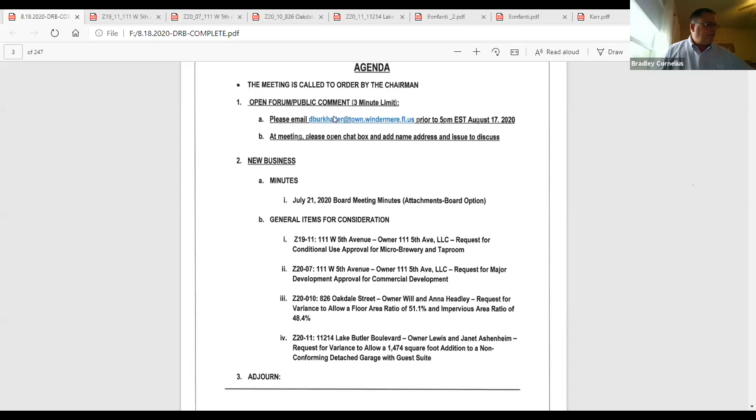So everyone knows who I am, I'm Brad Cornelius with Wade Trim. I serve as the town planner. And this evening, what we have is two cases related to the proposed microbrewery tap room at 111 West Fifth Avenue.

And these are, just so the board is aware, two separate hearings, and there'll need to be two separate votes, because one is for the conditional use, and I'll go into that in just a moment. And the second case is for the major development, or the site plan for the proposed commercial building. So we have two separate approvals or recommendations that we'll be looking for from the DRB with this case this evening. So we'll start here with the conditional use.

So the conditional use, the case number is Z19-11. Again, the property is 111 West Fifth Avenue. The owner of the property is 111 Fifth Avenue LLC. The applicant is Mr. Andrew McGhee. And as Robert said, Mr. McGhee is online with us today, and he will have a presentation for you about his proposal, his operation.

So what the request before you this evening is the microbrewery and the tap room, and it's in our staff report. It's one of these uses that is not clearly identified within the town's code as being either allowed or prohibited, it's just not addressed. So the town code has a provision for those kinds of uses that allows the town to consider them, and for the town council to approve them through a review process to assure that it's consistent with character and is a positive thing for the community.

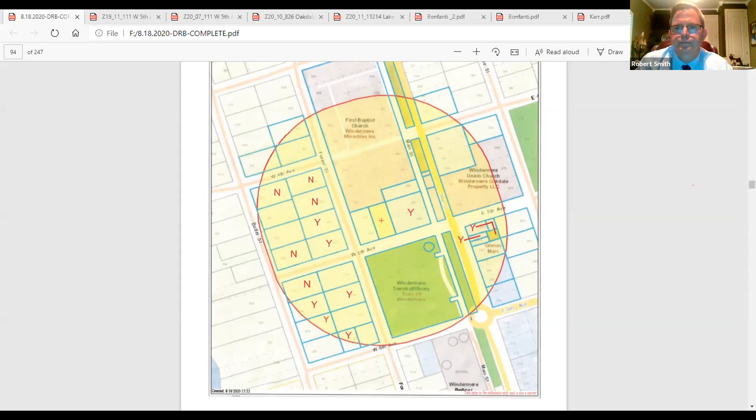Mr. Ober, that would be my recommendation, is do them separate. Can you see it? No. So right now we're hearing about the conditional use? Yes, only. Okay, thank you. Mm-hmm. All right, let me try to save it as a PDF, and then I'll be able to. Oops, sorry.

Sorry about that. Does Andy have it? Maybe he can share his screen. I do have it if I would be allowed to share it from my screen. Yeah, I'll go ahead and allow you to do it. I'm sorry about that, Andy. When I did a beta test, it was showing up on mine, which usually works. But let me go ahead and give you the ability to do so. All right, go ahead, Andy. One moment, just bringing it up.

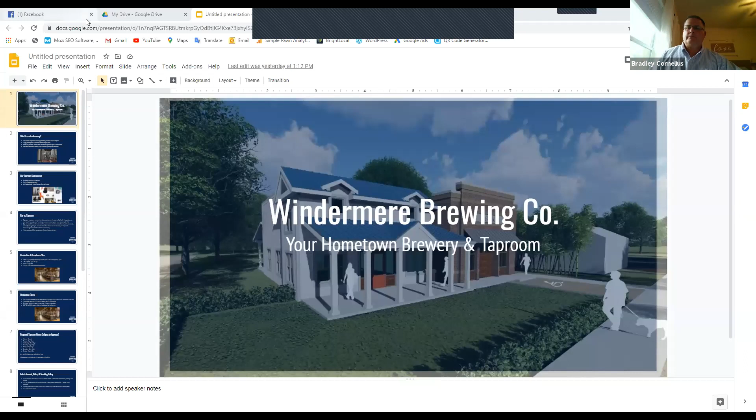All right, let me know if you can see my screen now. Yes, sir, I can see it. All right, great. So let's go ahead and start kind of where Brad was discussing, basically what the scale of a microbrewery is, and specifically what our scale is. One question for the board: would you want to ask questions after each slide, or wait till the end of the deck? I just want to make sure it's in the format that makes more sense to you. I think probably while we're on each slide, if anyone has a question, just jump in. Okay, that sounds good to me, it's not a very long deck, but it is definitely some granular information you might want more detail on.

Okay, all right, so let's discuss what a microbrewery is. As the industry definition goes, it's a small-scale independent brewery that produces less than 15,000 barrels per year. And as Brad stated, that is the Orange County limit, 15,000 barrels per year. They actually use the industry definition for a microbrewery when Orange County adopted their code. Basically, the major and primary point of a microbrewery is to supply their own tap room with cereal malt beverages, or beer in the less legal sense of the word. It is the historic model that most small towns have used throughout Europe and the United States.

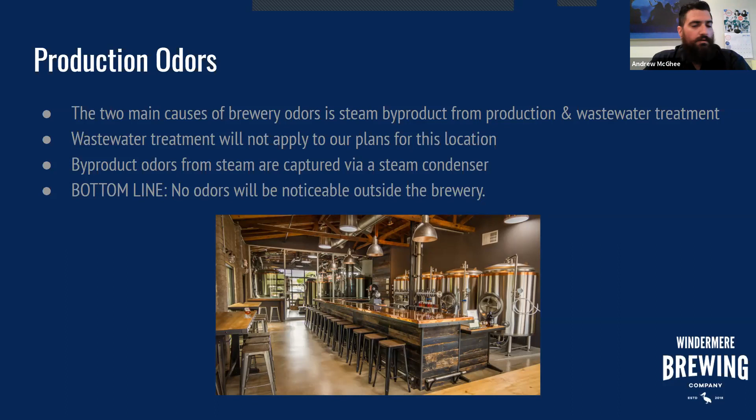I do want to make a point already: Sunday, we already had a pretty big discussion about 12 p.m. probably not working, because we want to be mindful of traffic. So we'll probably say 12:30 or 1 p.m. on Sunday, since we want to let the outflow from church get out before we open.

Last call for any closing time will be 15 minutes prior to all closing times. And after 10 p.m., if we're able to get some later hours, as Brad mentioned, these are all within the town's ordinance for alcohol consumption.

After 10, if we are open past 10 p.m., any outdoor common area - the backyard, back patio, or front patio - would be shut down. So any patron at that point would have to be inside the tap room, to alleviate any outside noise we can control, and bring everything inside after 10 p.m.

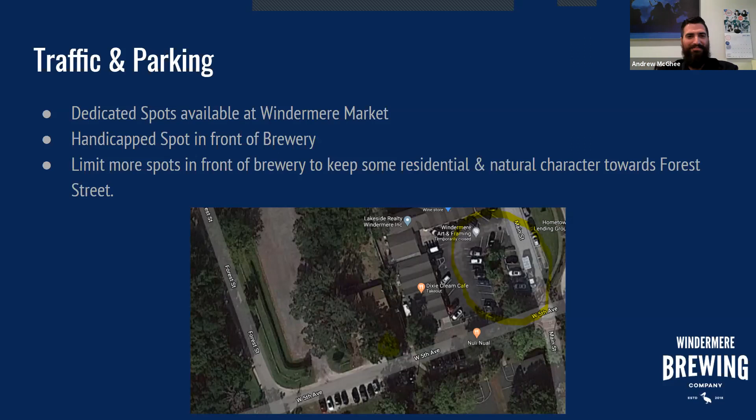So that is pretty much our detailed overview that really breaks down all the key points in our conditional use, everything that we needed to cover for conditional use. At this point, I'm going to go ahead and open it up for questions, but I'll turn the reins back over to Robert.

Outdoor seating in the back, or what kind of seating are you gonna have inside and outside? Inside seating will be planned for fixed seating. We still do not have an exact number, but we have a rough idea — around 40 people. That's absolutely contingent on two things: septic capacity and fire code.

The second thing is if we do venture into outdoor seating, which we have no plans on at opening time currently, it would be exactly what Dixie Cream does — we'd work in non-permanent or collapsible seating. But all in all, the plan for the backyard is just more open space, a place to play yard games, sit down in the grass, bring a blanket, that kind of thing at this point.

So is there going to be music inside the tap room? As far as on the speakers, not live entertainment. As far as live entertainment is concerned, no, because we covered that in the development meeting — we are currently not allowed under the code to allow live entertainment.

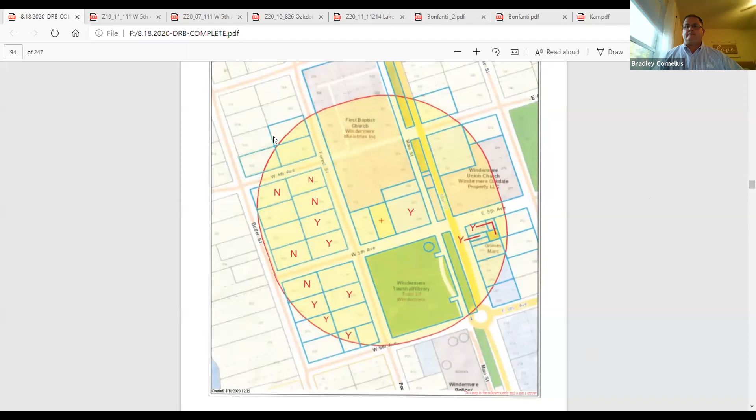I think the back property line is pretty much on the other side of the fence from the children's playground. That's correct. The children's playground is behind this property.

I will add real quick, the church is one of the first people that we went to when we were planning all of this. We wanted to make sure that we were not going to be stepping on any toes with them, and that we are meeting all of the expectations that they had for us as well. And Andy could probably comment on that a little bit further if he'd like.

So I actually have, and of course it is completely up to the church to comment on their own, so I won't comment for them. But I have sat down in person with the church and discussed these plans with them, and have actually reached out to them again leading into this process. Once again, no conflict, but I will not put any more words into their mouth because I am not them and I do not speak for them.

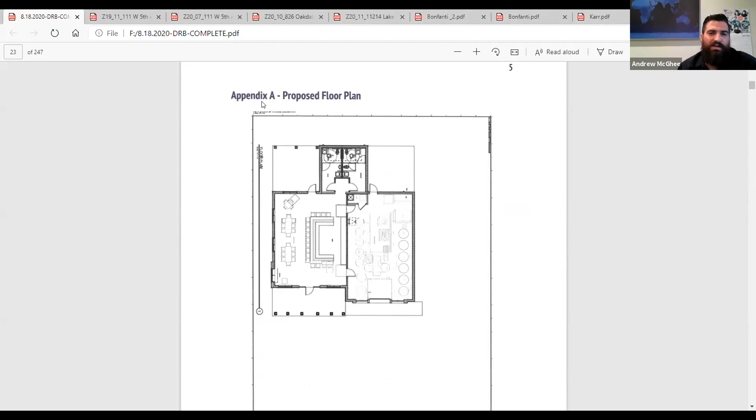At the same time, to address the school issue, when we get into the design plans, you'll see a lot of the mitigation that we are looking at to screen and add much more barrier between that fence line there. Of course, yes, we do know that there's a playground there, but if you're going to use that argument for us, you have to use that argument for Tim's as well. As Brad said, it's not in conflict, it just has to go under conditional use.

I will also like to mention, just as a personal anecdote, that I do send my child to that school. I would not be opening an operation that would do any harm to children. So that's just a personal anecdote. I bring it up because it's been a law for a long time in Florida, and we've tried to follow some rules here. That's all, nothing personal at all.

But I look at the hours of operation, and it seems like they're completely opposite. Yes, Peter, thank you for bringing that up, I actually forgot to mention that. We did put some thought into flipping those hours to try to be very much on the tail end of school. Realistically, from 3 to 4 to 5 p.m., you're not going to have a high amount of traffic at that point anyway.

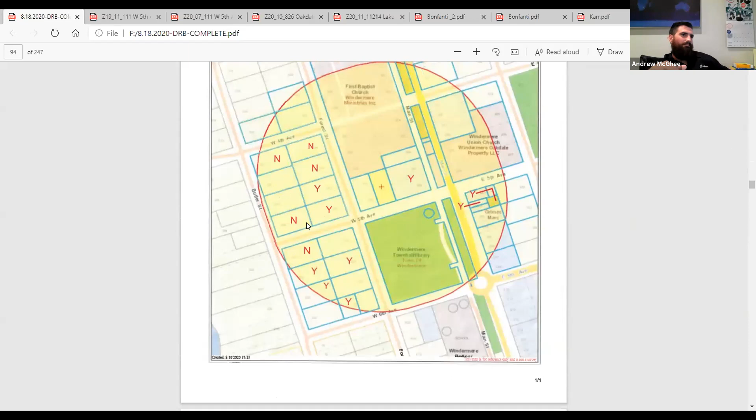I'd like to point out, even though we're absolutely flexible on the hours, if we go back and look at the 11 to 8 for and against within the 500 feet, the two closest to our actual facility are actually yeses. So I wanted to point that out. And then you have two no's right next to them. So right, just pointing out the yeses. Yeah, I was glad to see that. Yeah, and there's a circle of no's around them, but okay.

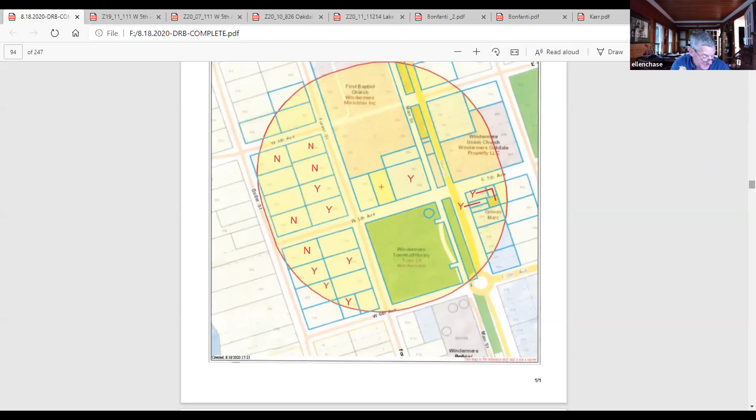So we can sit here and discuss things like noise level, parking. These are notes I made to myself: outdoor noise, which he says there will be none unless it's made by his clientele, I suppose. 40 seats, indoor only right now. And then hours of operation. So all these things are things we can limit with the conditional use permit.

Yeah, with the noise ordinance, I think that would be applicable. And remember you have the code violations and police call-outs as well, which is your leverage over making sure they adhere to whatever conditions you impose on them. Right, so as far as decibel levels or anything like that, that's going to be really hard to manage. But if there are calls relative to noise complaints, that's something that can be documented and obtained for us to follow through with the code enforcement procedure.

Wish that worked for Bird Island, but... Isn't it the noise ordinance, Robert? Isn't it like after 10 o'clock you shouldn't be able to hear anything within 300 feet or something, or less? Correct, you shouldn't be able to hear it, and if the neighbors are going to hear it, they're going to call.

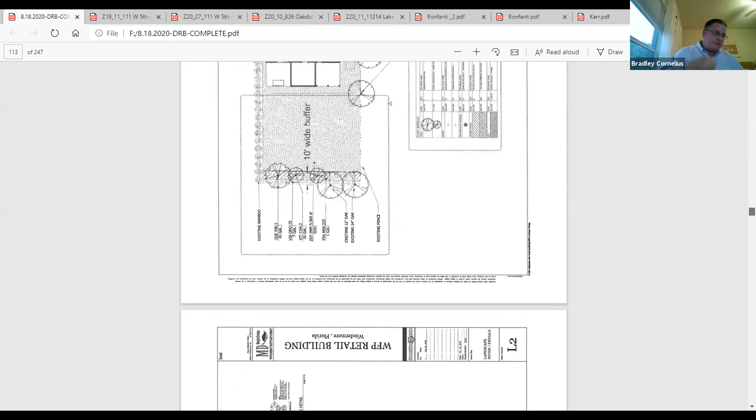Okay, so we'll move on to the next item, which is approval of the commercial development. Mr. Chairman, our next item is case number Z20-07, at 111 West Fifth Avenue. This is the major development review for the proposed commercial building there.

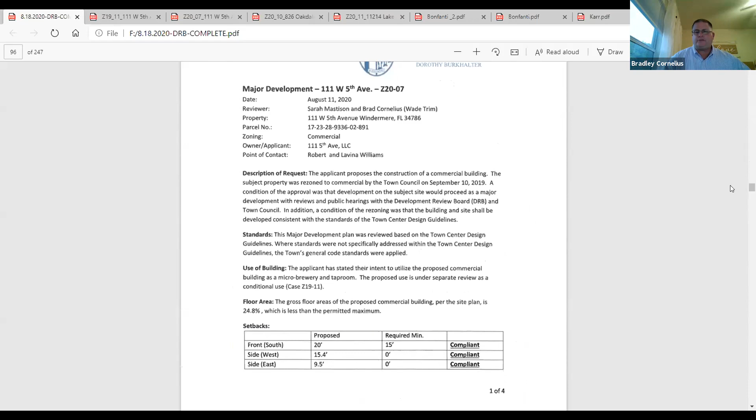So this request is to develop a commercial building at 111 West Fifth Avenue. To be clear, the proposed building is designed based on a proposed microbrewery, so the analysis in terms of parking and traffic is based on that. What the owners are looking to do is construct a commercial building on the site. The building is actually approximately 2,519 square feet under AC, and with the porches added, it's 3,847 square feet.

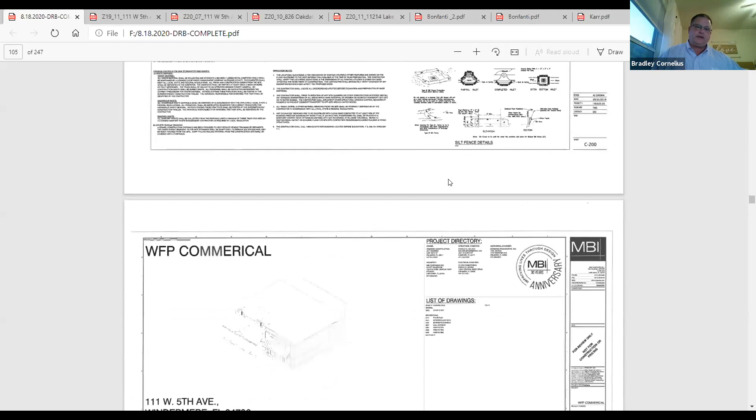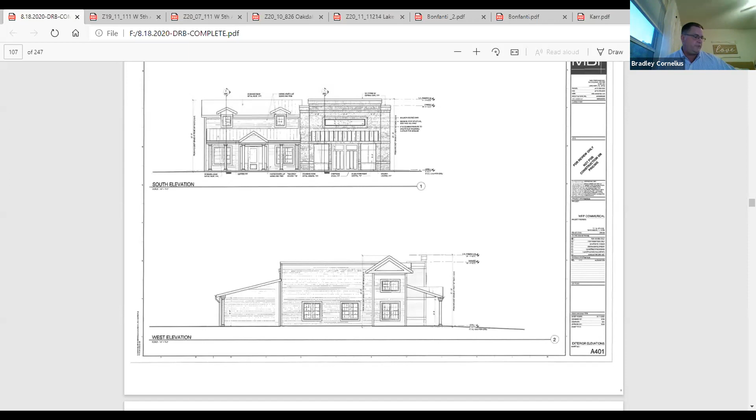Thank you, Robert. If you go to the part showing the building elevations now—there we go, we'll stop there. So there is the proposed building elevation, the front of the building. This has been developed and designed to be consistent with the architectural design guidelines for the downtown district. It provides facades that are consistent, awnings that are consistent, and consistent materials. So they designed this not as a typical box commercial building, but with the design guideline architectural standards in mind, which was part of their condition of approval.

Robert, if you can go a few pages forward, there are some color renderings where you can see, thank you, sir, the color rendering of the proposed facade of the building. You can also see, jumping ahead a bit, the proposed landscaping at the street with the hedge, as well as it coming around the side of the building, creating a courtyard area in front. There you can see the handicap space and the sidewalk with the building. So in our review, we found the facade consistent in terms of the architectural design.

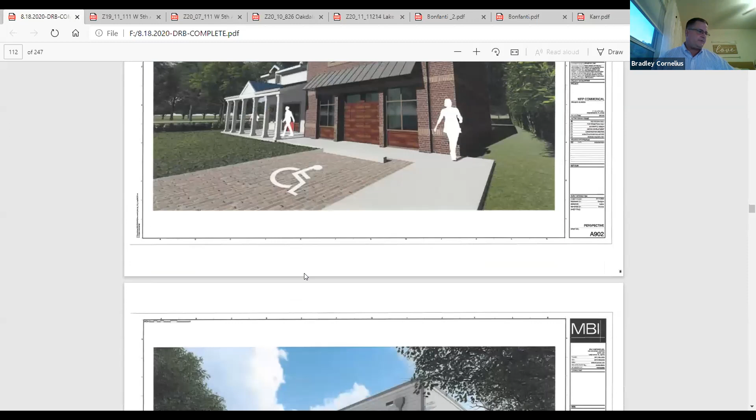You can go to the next page, Robert, please. This now shows the back of the building, the back porch. This would be the porch on the side by the parking lot, so on the west side of the building is the open porch behind.

Next page, please. Now this is the landscape plan, part of the landscape plan. There are several pages of it. As Mr. McGhee said earlier, at the back of the property where it says 10-foot wide buffer,

that is the buffer that would be required under the design guidelines to adjacent properties. We actually required them to enhance and enlarge it and add more landscaping back there, which they did. They revised that, added more trees and more landscaping. There is already a fence between the two properties, but this would be adding landscaping to that fence line.

You can see there'll be hedges along the eastern side between them and Windermere Market, and as we saw in earlier pictures, hedges along West Fifth Avenue coming around the side, as well as in front of the small retention area, which is all required by code to be screened. I will say one area deviates a bit: there's a requirement for landscaping along the base of the building, along 50% of the front facade. But instead they're providing the landscaping out front on West Fifth Avenue, meaning you don't see the base of the building where the landscaping is placed.

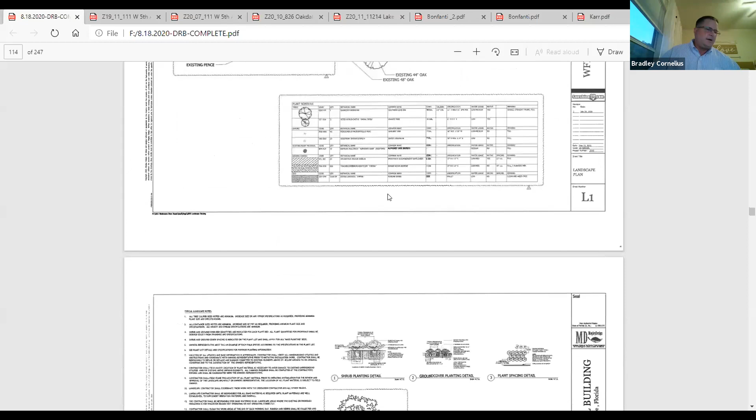That is the request for that part of it. Let's go 2 more pages—these are more landscape details. One more, right there, thank you.

What this slide shows, as we said earlier, is the plan for this commercial building to use a shared dumpster at Windermere Market. There is a plan to improve that area, as Robert is showing, and actually make a sidewalk connection between Windermere Market and this proposed commercial building. So that is part of this proposal.

That work would have to go through a separate right-of-way permitting process with Public Works, since a lot of it would be in the right-of-way of West Fifth Avenue. It has been preliminarily reviewed by Public Works, and they did not object to it occurring. It just needs to be worked out if this moves forward. So that shows the improvement in the area.

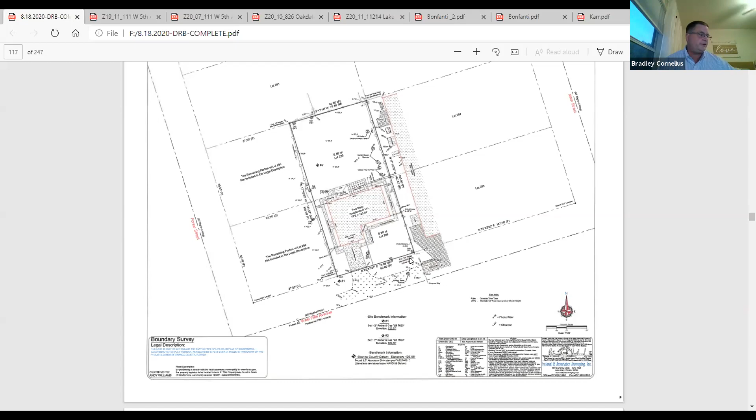They will also be screening the dumpster that's there, which would also be an improvement over the current condition. So that is my summary of the major use and the highlights of the major components of it. We do believe it is designed consistent with the design guidelines.

So the next step would be for the DRB to provide any recommendations or comments on it. Then it would go to the town council for two hearings, in September and October. So that is my presentation. I can answer any questions.

I'm not sure if Mr. McGhee would like to add anything to the site plan discussion. Just a few things—of course, I'm speaking on behalf of the site plan as well this evening. I wanted to add quickly that although the primary idea is to put the brewery and tap room within this building, for the applicant's sake, I'd like to clarify this is an open commercial concept. So whether or not the brewery taproom conditional use is approved is not necessarily contingent on this building. I want to make sure I put that out there in the building owner's best interest as well.

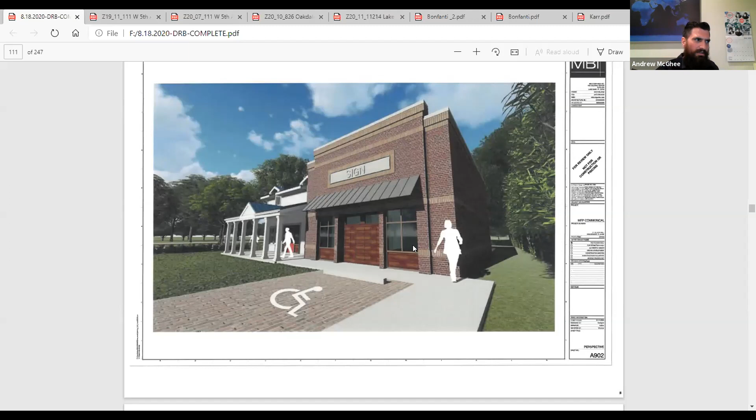And the other thing, I think Brad pointed out, is that we do have hedging on the side facing Forest as well. Did we make sure we pointed that out? Yes, you have the landscaping along Forest Avenue. Yes, sir.

And if you go even further down, where that hedging is and towards the oak trees, we would have more screening there as well.

And I do want to say, Mr. McGhee did bring up a good point - that is correct. This major development would not be limited just to a proposed microbrewery, and the design standards would have to be consistent. The parking would be the same no matter what kind of use went in there. It's a flat 4 per 1,000 standard, no matter what type of use goes into that building. So if this building were approved, it could be used for other uses. Absolutely.

I have a question on the handicap parking, where it's located, and then we have the loading zone for Dixie Cream and that whole complex and this building. What's the setback on having handicap parking next to loading zones? Is there anything about that in the law? There's not, and the loading zone would actually be fairly well separated from that, so there is not a conflict there with the loading zone and the handicap space.

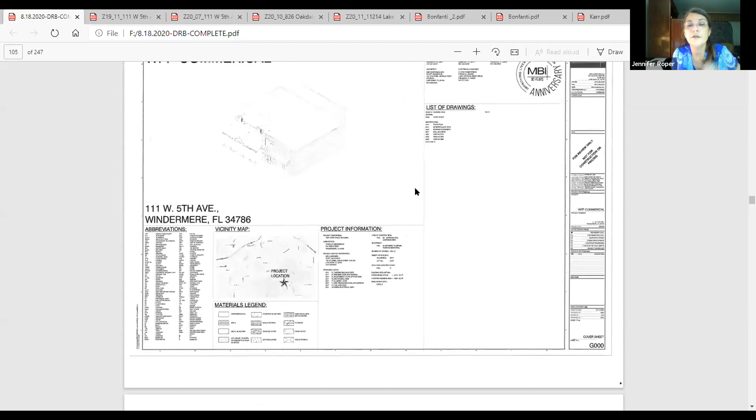Okay, so the loading or unloading would never pull into that handicap spot to pick up or drop off? I can't say they would never do that, but the designated loading and unloading would be on the Windermere Market property. And then they'll carry everything over to their place? Because part of this plan is they make a better connection with the sidewalk between Windermere Market and here to facilitate that happening.

Brad, just to add - right now there's no indentation, and their intent was to make some sort of indentation so it wouldn't be blocking the roadway when they do their deliveries. Now, most of the deliveries are going to be for Dixie Cream and not for whatever goes into this building.

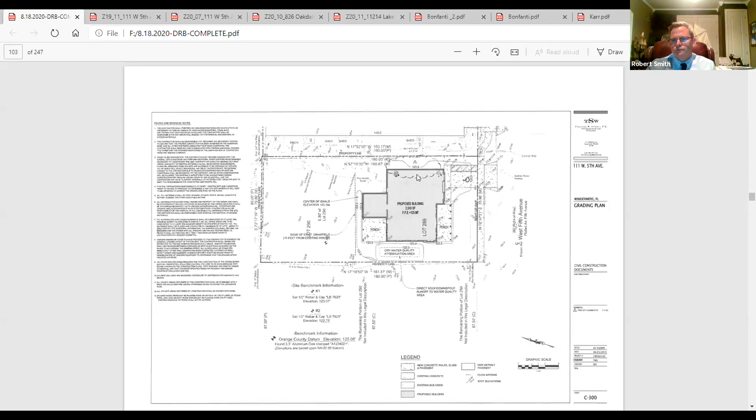Right, because it is a good distance away that it's safe. It wouldn't block access to that handicap space. Okay.

I guess whoever the tenant would be would know that was handicap and not a delivery spot. Right, and if this major development is approved, that would be a condition of the major development that that has to be the handicap spot.

And this is on septic, but it is on county water? Is that correct? That's correct. Yes, ma'am. Okay.

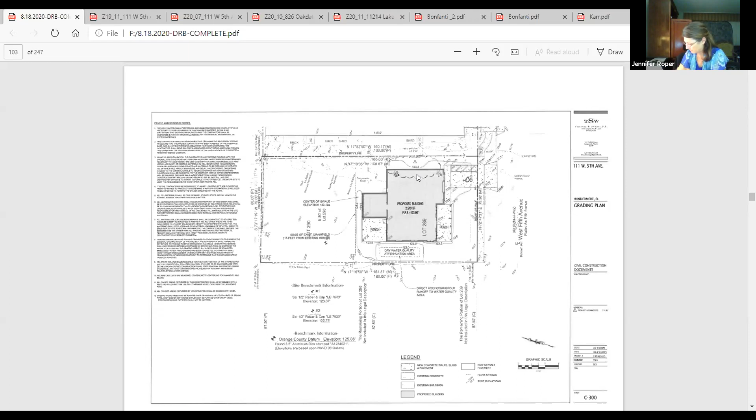Does it meet the floor area ratio and the impervious? Yes, it's well under the floor area ratio and it's well under the impervious. The floor area is 24.8%, and that includes the outdoor porches.

Where's my impervious? Yeah, and I didn't write my impervious, but the impervious is well under the 45%. Okay.

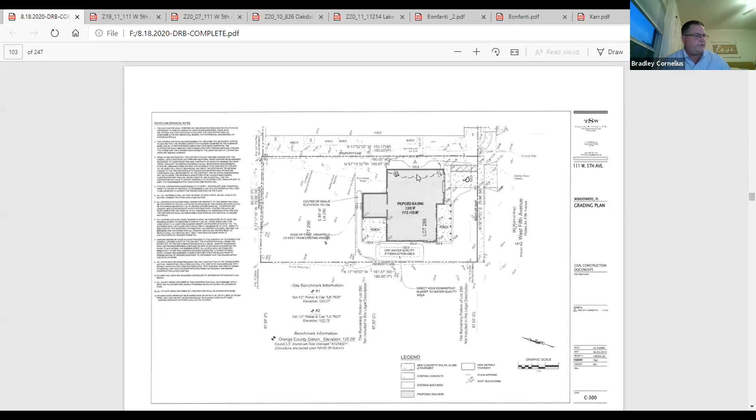And the building height is less than 35 feet. It's roughly 28, 29 feet, but it's less than 35 feet.

The area directly behind it, is that the playground? There's no other building back there, is there? Right, on the back of the fence is the playground on the back side of the property. Correct, that's right.

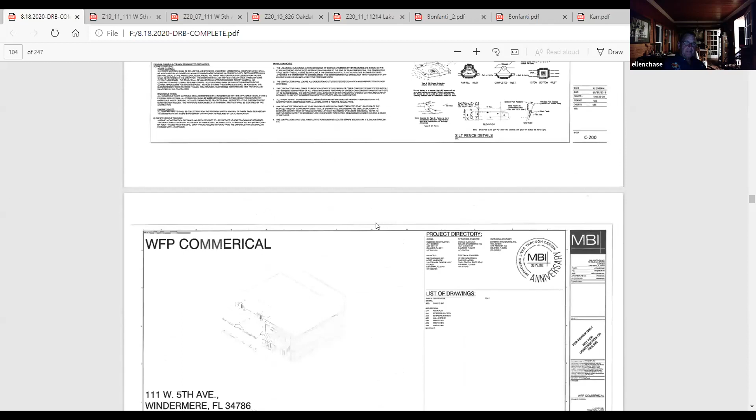And I think nothing else could really be built further back, because isn't there like 2 septic systems in there now at this point? There's the house, and then there's Dixie Cream. Right, there's the big septic system in the back, so they're pretty much limited to go any further to the back of the property. Correct.

I was concerned about wells, because I know there's some heavy duty septic that's got to be going on in that backyard by the time these two were built, between Dixie Cream and whatever impact that would be - but there's nothing back there, I guess, to impact.

Well, I mean, Forest Street, I guess, if it ran that far, but it probably meets the 120-foot distance from a well. And those septic systems have been in place, and any new system would have to go through permitting with the health department, Orange County Health Department, and meet all the current requirements.

Was there 2 bathrooms in there before? Is it kind of still having the same number of bathrooms? I guess, I don't know what was in the house prior to it. Not important.

It had 4 bathrooms, the current house. But the septic system is going to be based on whatever business goes in there, because it's very different if it's an office versus if it's the brewery. True - any commercial will be permitted very differently than a residential septic system.

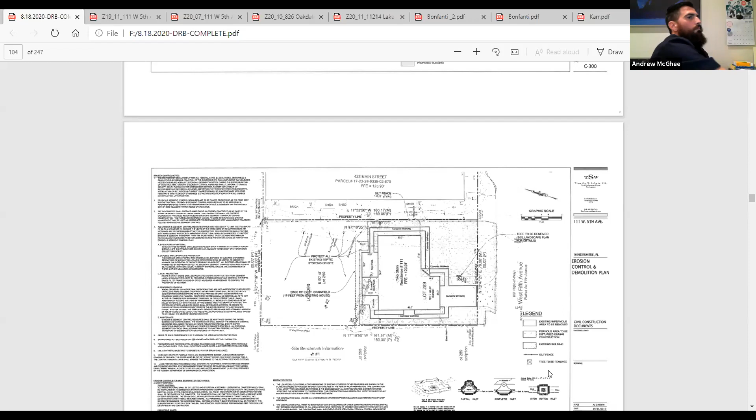I'd like to make a motion to approve this major development approval for commercial development. Anybody want a second?

If this is approved, and another business comes in here, just in case the council doesn't approve the brewery, would that be a conditional use as well, based on the way this is currently zoned? No, I need a second before further discussion, please. Or the motion dies for lack of a second.

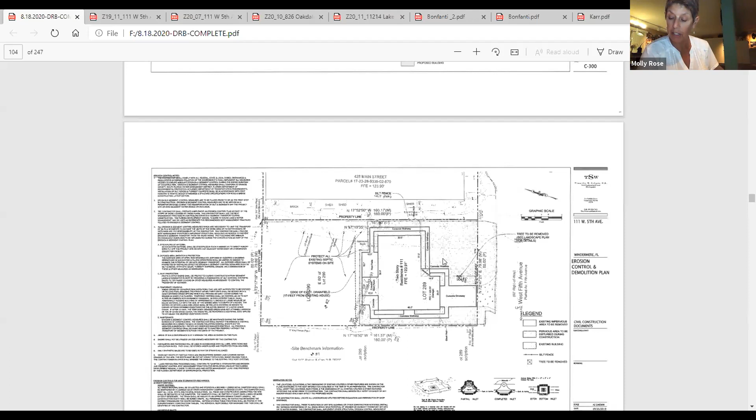What was the motion? I made a motion to approve the major development approval for commercial development. I'll second it for discussion.

I see on this major development, in the packet, it has use of building, but it does say the proposed use is under separate review. So this doesn't bind anything to the conditional use. That is correct, that is correct. This doesn't bind it. Okay.

This is basically a redevelopment plan as a commercial building. That is correct, yes ma'am. The condition only goes with a use. So if another realtor goes in there or another type of office, then it wouldn't need a conditional use permit. Correct. Okay.

All right, any other discussion? Since we do have the residents there, I would just, and it may be in here, I just haven't been able to read the whole thing, that we would have all that buffering, the buffering on the west side and the north side especially, thinking about, of course, not knowing what would be there.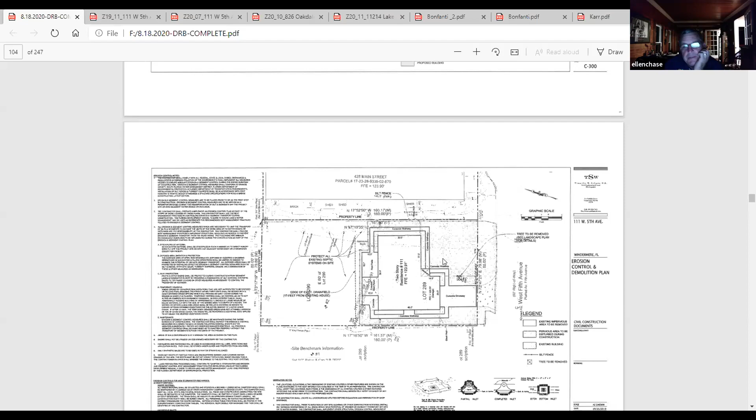Okay, so does it have, I'm sorry Frank, can you scroll back to that, Brad? The landscape plan, I think Robert's got control there. Because the drawings, it's hard to tell. So it shows the landscaping down there.

See, that's behind Dixie Cream, is where I see that hedge. I don't see one on this side where the fence is. Well, on the south side we did not require them because that's abutting a parking lot. So there's no... no, that's west, isn't it? This is where the arrow is. Yes, that's west.

Right, so the parking lot sits, I'm moving my mouse so you can see. The parking lot sits where Robert is. So in terms of buffering between the building and a commercial parking lot, or the town's parking lot, that's not required. Again, you can recommend it, but it's not required.

And as Robert said earlier, the parking lot has its own buffering with the berm and the enhanced landscaping on the parking lot. So what they did is they increased the buffer and landscaping here on the back side adjacent to the church playground. And then they're providing landscaping between them and Windermere Market, as well as a landscaping hedgerow along West Fifth Avenue.

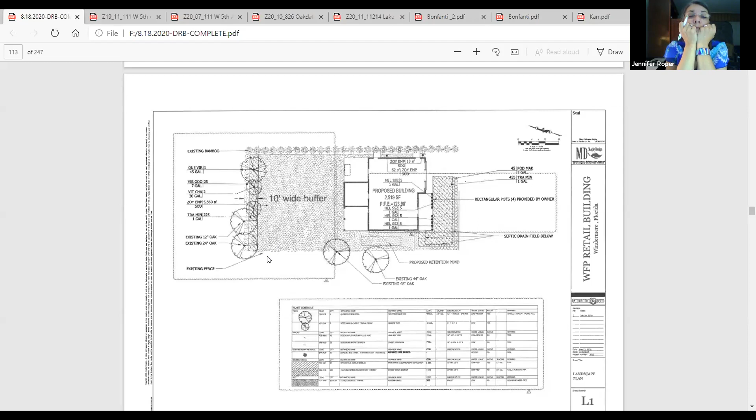Okay, so any other discussion? Are you okay with that, Jennifer? I mean, I would like, if it's something noisy, we don't know what'll go in there. It probably will be the brewery if past shows what'll present or future.

So I'd like to say that I'd like to have a landscape buffer all the way down the west side of that fence, all the way down the west side of the property, and then leave a place where the gate is. But I'd like to see a hedge there at least. Maybe it'll break down a little noise.

So Molly, are you friendly to that? I am. Okay, I am. So do we want to restate the motion? You got it, Dorothy, can you read something back for us? Or do we need to restate it?

I mean, is that additional hedge there on the parking lot gonna maybe create some security issues or be so isolated then? You have people coming out of there at night. You have a hedgerow, a 6-foot PVC fence, and I think what Jennifer's asking for is an additional hedgerow on the other side. I'm just thinking sound buffer.

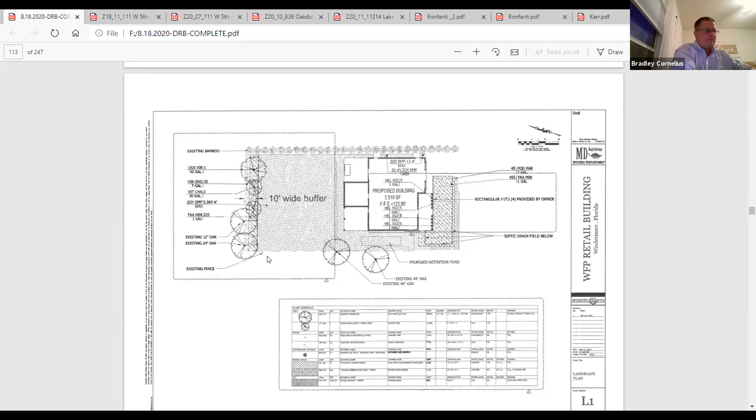It's 8:29. See y'all at 8:34, or sooner if we're all back, I guess. I'm definitely going to go grab a soda real quick. And we'll wait for Brad to return, and Peter.

All right, I put my dog away. We're good. Okay. Should we? We don't have a quorum though. Yeah, we just have to wait for Peter Fleck.

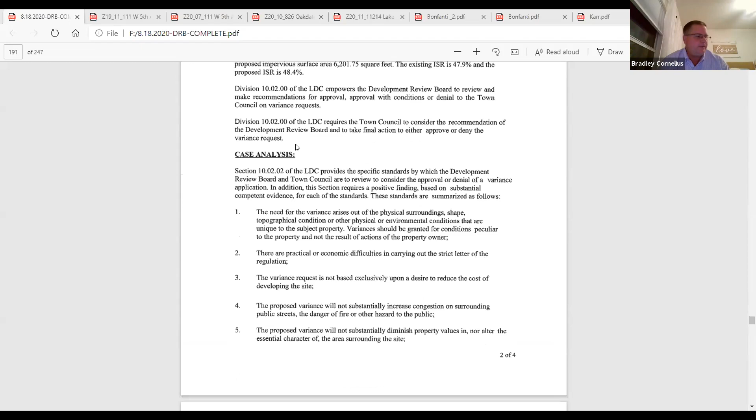This variance is related to an addition they're looking to do to their home, to add a bathroom to the back of the property. This came about when they submitted for their building permit and through our review of it. The situation on this lot is that the existing home was permitted and built in 2005 and 2006 through Orange County. I did see the permit from Orange County.

It currently exceeds both the maximum floor area that's allowed. The current home, detached garage, and everything is actually at 50.1%, and as everyone knows, the FAR maximum in the town currently is 38%. So they exceed the maximum floor area ratio allowed on a property. The site also exceeds the maximum impervious ratio. Currently, the impervious ratio is 47.9%, and their proposed addition, with other site work, would bring that up to 48.4%. As the board's aware, the maximum impervious allowed on a site is 45%.

Because the site is already non-conforming related to floor area and impervious surface, any additional floor area and impervious would have to go through a variance process to be permitted and allowed. The request is to add a bathroom on the back of the structure, approximately 56 square feet. You'll see on the plans we're also including an upstairs covered patio. That's not a concern for this variance because it's already under roof and considered part of the floor area—there's no issue with them enclosing that second floor covered balcony. The issue is with the addition of the bathroom at the back of the property.

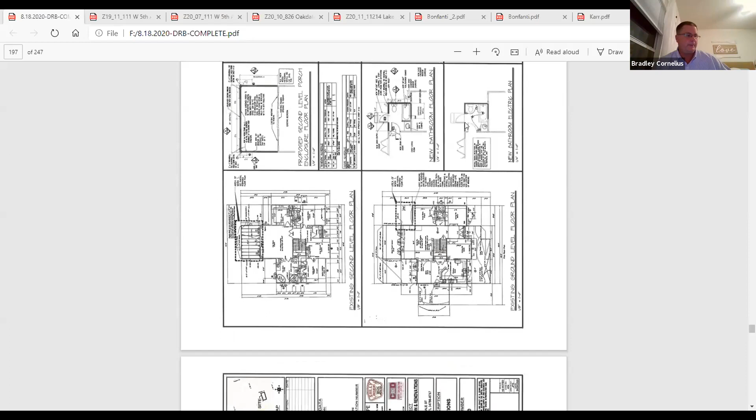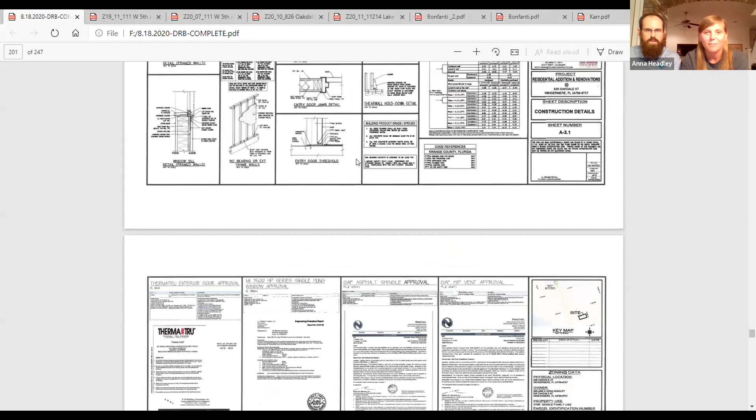Hi, yes, this is Anna Headley, 826 Oakdale Street. We moved into this house 3 years ago with our 2 kids, who are now ages 3 and 5. Having grown up in Windermere, just on 7th Avenue, we're loving being back in downtown Windermere. But as our kids have gotten older and we've been using our pool more often, we just wanted to add a bathroom that was accessible from the pool.

Right now, from our enclosed pool area, you have to go through 4 doors to get to a bathroom, and with little kids, that can be a challenge. So this request—not knowing that the house we bought was not in compliance—we're just requesting that a small bathroom be added so we could take our kids through 1 door to get to the bathroom when we're playing at the pool.

Mr. Chairman, I'm sorry, I also forgot to state, with the public notices, we received 26 in favor and 1 in opposition to this request.

But the one not in favor, when I read the description, it really didn't have anything to do with our request. They were complaining about a drainage issue on their lot that's 2 blocks away, so it didn't actually have to do with our bathroom addition.

One other thing—where the bathroom is proposed to be located, it's not visible from any other properties, behind a fence and in the back corner of the house. It wouldn't be visible from anywhere off the property.

The comments we received were mostly about the town not having adequate stormwater infrastructure in place. But with the grants we just received, over $1 million, we are working on those issues around 9th and Oakdale, and in that basin area. We're working on the design right now, and we'll probably have a couple of meetings and charrettes with the residents, but we are working on that issue. They shouldn't be penalized for what's perceived to be a town issue.

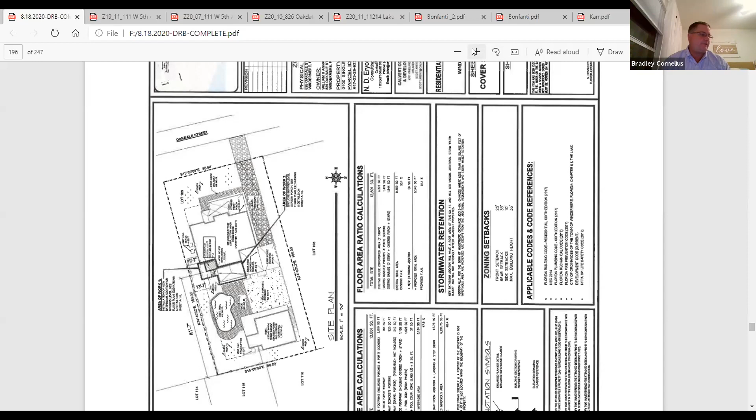Brad, can you blow it up a little bit bigger? Ms. Roper, when I was out there, no, there aren't any berms or swales on that property currently. Yeah, I looked at it today and the front doesn't have any.

Right, so that's something. It's 56, what is it, square feet? Well, the increase in impervious is a little bit more. The increase to impervious is 67.75 square feet because of work they're doing around the bathroom.

Right, so the impervious is 67.75. So if they would remove a 10x7 area of pool deck or something else out there, they could offset it. And that was a discussion we did have with the applicant. If they can offset the increase, then it was not an issue, we can move forward.

Mr. Headley, have you consulted a civil engineer and investigated possibly underground compensating storage? No, we have not engaged with a civil engineer at this point.

I think you could overcome a lot of these objections if there was a possibility to basically put some underground retention or something like that to make up for any additional stormwater impacts you have.

And Mr. Fleck, actually, there's enough room on their sides and the front where they could do above ground as well, it wouldn't have to be underground. Either way, but I think they could create compensating storage to overcome these impacts and maybe even get within the FAR guidelines.

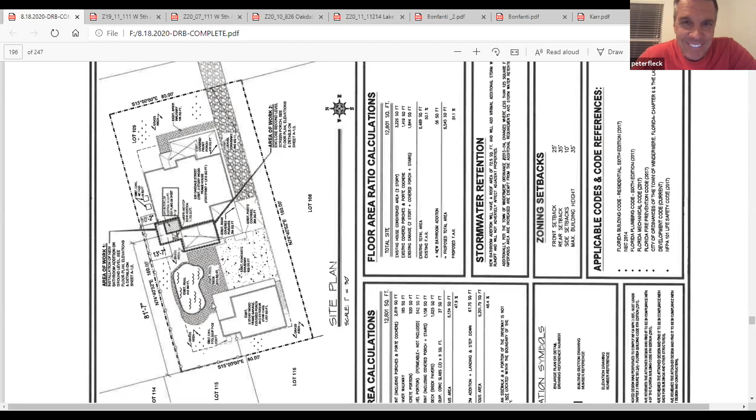So we're making a motion that we are approving the floor area ratio increase, but we would like the impervious area ratio to be engineered to meet code. I believe the position was you would allow the 51 or the 48.84% with an engineered retention plan that accounts for all the impervious on site. That was my understanding. There you go. Okay, hold on one second. Since there was no second, there is no motion, so it's going to die for lack of seconds. You can talk it out, whatever you want to do.

Yeah, I'm not sure that's what I meant. Are you saying bring them to the 45% from the 48.4 that they are now? Yeah, by using storage or removing impervious areas and creating non-impervious areas. The only way they can get from 48 to 45 would be removing some of the impervious areas. The storage wouldn't reduce that number. It would be reducing concrete or pavers with gravel or sod. That's how they would get to 45, right? That's the only thing I know how to do, but Peter, you seem to think there's a way of doing storage that I don't even know about.

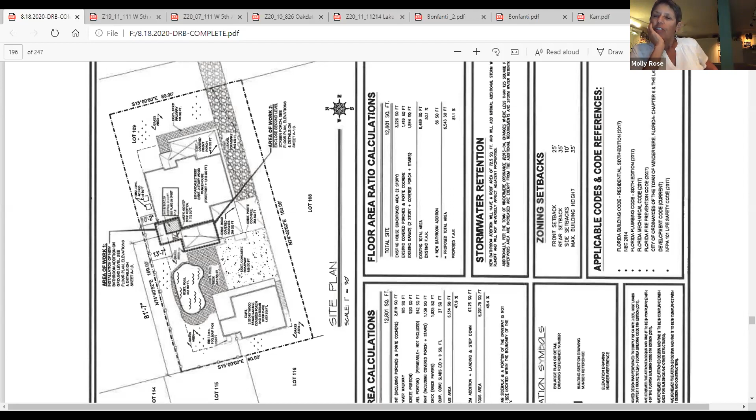So if we required that they did a stormwater retention plan, even though they're doing 56, we're sort of getting where we want to get. We want them to retain their 1 inch of water on their property like everybody else has to do now. Right, and then that impact could be with their stormwater plan. They'll have some deeper swales than what you see in other places of the town because of the larger area of impervious. Okay, that would be fine.

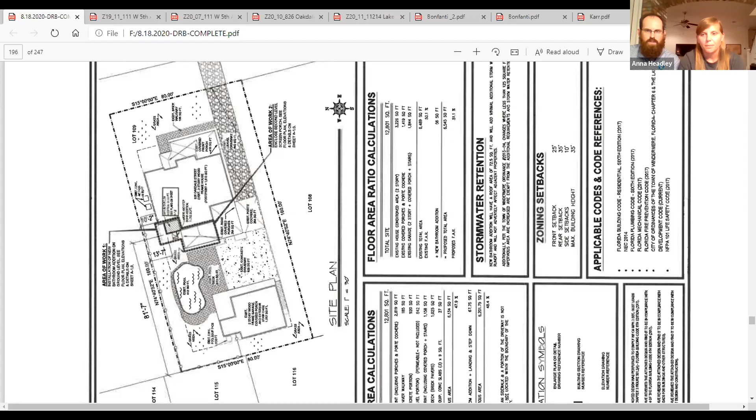Okay, I'll amend my motion to approve with an engineered stormwater plan that meets the city guidelines. I'll second that. I understand that. That's good.

Is that truly understandable? So what I take that as is, with their building permit they've already applied for, they'll have to provide also an engineered stormwater plan, like we require of everybody building a new house, to accommodate for all the impervious on site, including the addition. Right, to accommodate for the overage of impervious, to account for everything on site. Yeah, that's a good idea. Sounds good to me. All right, that's a project.

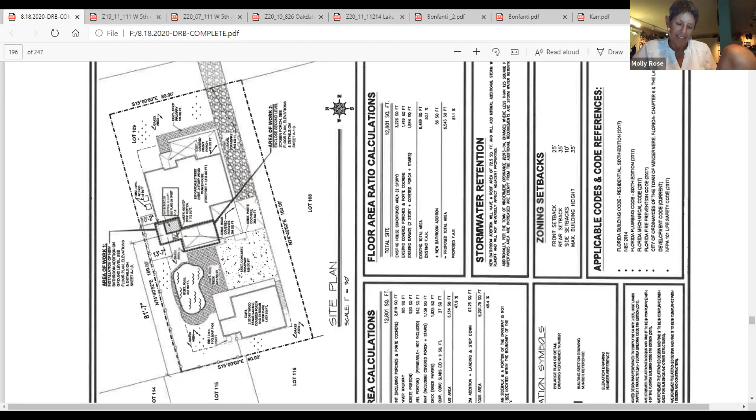All in favor? Aye. Aye. Aye. I guess we got everybody. Peter? I said aye, sorry. I didn't hear you, sorry.

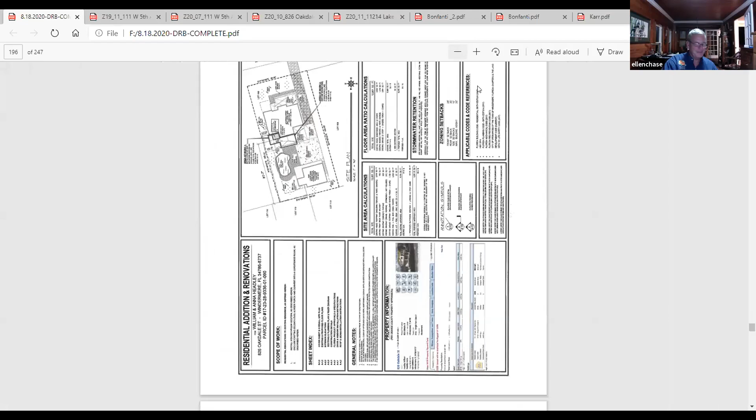Okay, we're just a recommending board. You still need the council to approve our decision on whatever day they meet next. What is that? September 8th. Okay, September 8th. So good luck. Thank you.

All right, and this is the final one. Last but not least here. And we do- go ahead. I'm sorry, Albert. We do have a speaker on this one, but it's going to probably be after the presentation, to speak on behalf of the neighboring property. Right. And I believe the applicant is on as well.

Hey, Robert, do you want to? Yeah. Peter Fleck has worked - he might want to disclose what he worked on for this project, but based on our conversations, there is no conflict. He is not looking to gain any financial benefits from a decision one way or the other. But I believe he has worked for this family or the property before in the past. But as it relates to the question at hand, again, he's not looking to get any financial gain from that. And Peter, if you want to expand upon what kind of work you did for this property, just to clarify it and show there's no appearance of impropriety.

Yeah, we just did some boat lift repairs and dock renovation work for him. Yeah, and this is relative to a variance for their garage in the front, which Peter has no interest in. That's right. And all that work's been completed and finished.

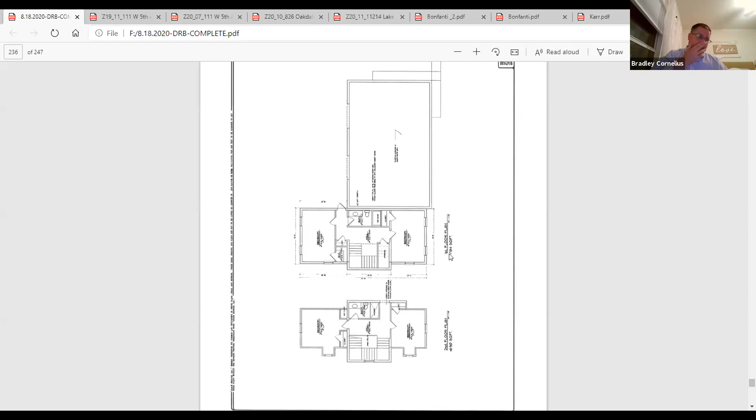Okay, so it's a setback that's 3 feet short, 2.5 feet short. And then the fact that it's in front of the house, and we really want them behind or in the side.

Okay, that is correct. Yes, ma'am, I have a question. Would the addition meet the front setback? Yes, it meets the front setback and the side. Is it right at the 25 or is it further back? It's further back.

It's a huge lot. How are we okay with the detached structure with bedrooms in it? Isn't that excluded? No, there's provisions in the code that's specific to an accessory dwelling unit.

A dwelling unit defined under the code has a living area, a cooking area, and a sanitation area, a bathroom. In this addition, you have to have all 3 of those components to be a dwelling unit. In this addition, we don't have all 3 components. We have the bedroom and the bathroom, but not the cooking or the kitchen. So there's nothing that prohibits that specifically in the code, but that is something that you as a board can consider if you're comfortable with that or not.

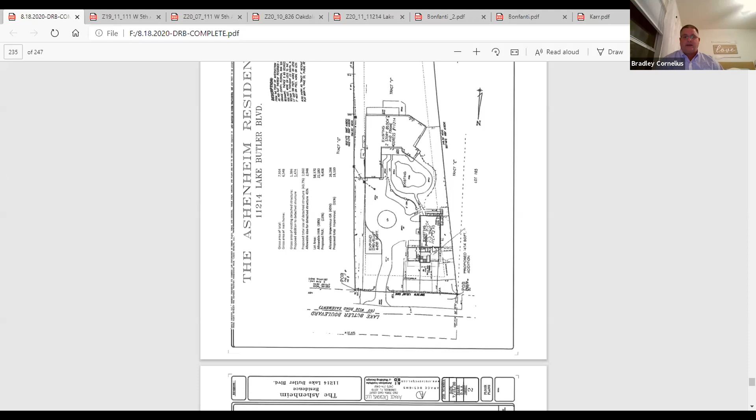Well, it's saying it can be attached or detached. That's the issue - having all 3 determines whether it's just an accessory structure or an accessory dwelling unit. It becomes an accessory dwelling unit if it has all 3 - the bathroom, kitchen, and living/sleeping area. Then it's a dwelling unit, so there's additional restrictions and limitations on an accessory dwelling unit.

Well, the building they're attaching this to, that has some type of guest suite, it said. Does that have a kitchen area? We'll have to check - can this be a standalone house? I don't know the answer to that.

Yeah, it has a sink and there's a counter, a microwave, and like a coffee pot and teapot, because we're tea and coffee people. But it is more for guests, because we have a huge family that are all over the world, and when the children come and my nieces and nephews come from everywhere to spend time, we really just don't have the room.

So for us, we didn't put up the structure - we were just learning and understanding that where it wasn't wide enough there on the side by the step, it didn't meet the variance. We didn't know all of that. But the bedroom, there's only one little bedroom and a bathroom upstairs where it is, and it can only have a double bed in it. It's that small, so it doesn't really meet the requirements that we need as a huge family.

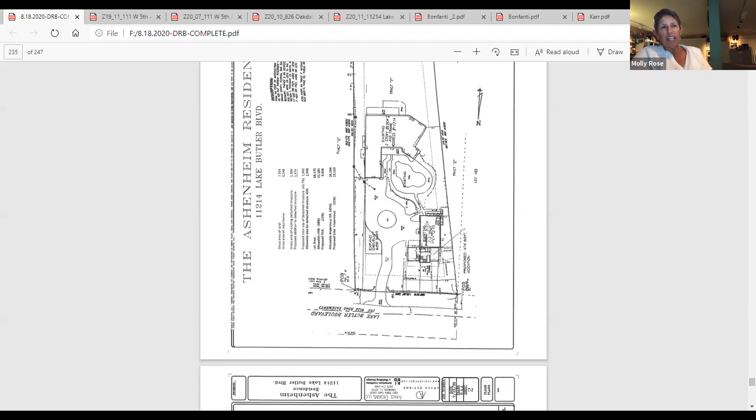Well, I recalculated it. It's closer to that number, but what's on the tax record is 50-something. That's what's on the tax appraisal, that's what I typically use as value. Right, the difference, Ms. Rose, is the tax collector or property appraiser includes the area of the lot that goes out to the lake. Oh yeah, so when we do the calculation for building permits, we only count the area landward of the normal high water line.

So we do the calculations. If we readjust that and use the 41,544, we are under. 15,790 is the FAR and 18,699 would be the ISR, which is still under the 22,180 allowed and the 26 allowed. We're still way under. This is a very large lot.

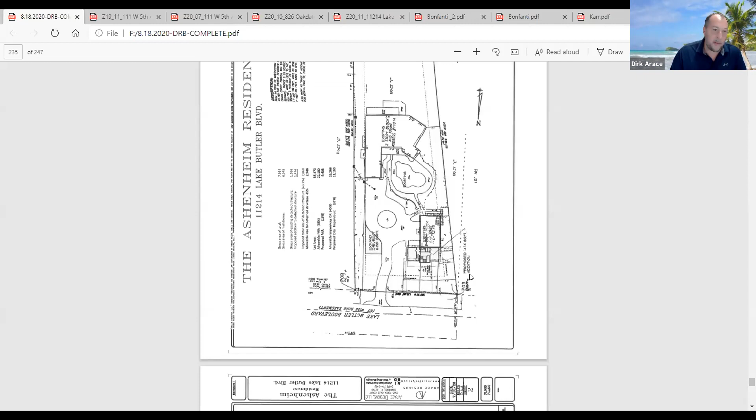I mean, we can adjust that number, obviously, in the document when we go to it. Okay.

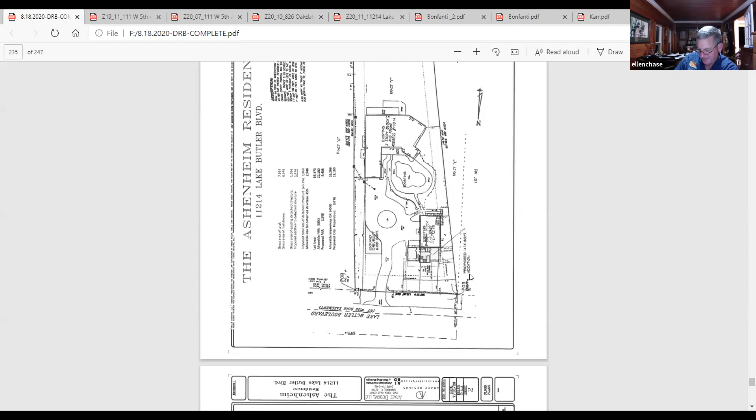So the main reason we're here tonight is because it's a non-conforming use, a non-conforming detached garage currently, correct? Correct, yes sir. I'm getting confused by all this ISR, FAR stuff, so okay. You're correct. And still with the new, I get the lakefront thing and how they measure out into the water on the property appraiser's website, but, so...

Anyway, okay, let's hear from Dr. Schur — is that the only person we have to hear from? We have Mr. Jonathan Huels, who is the attorney for the neighbor. I believe you would like to speak. Okay.

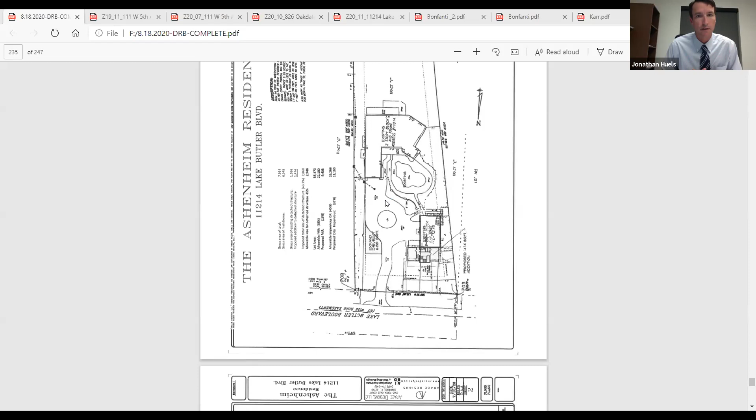So we're asking you to deny this request, or recommend denying this request. I'm happy to answer any questions you may have. And I appreciate your time—I know it's late in the evening, you've been at it for a long time. Thank you for the opportunity to speak.

Does Dr. Schur want to address the little structure they were talking about at the front down by the lake? It was a little firehouse—a child's firehouse. It's not 2 stories, it was a single story.

Excuse me, hold on—please, I'm going to have to mute you. It's still the neighbor's turn to discuss and hear from the public. If we need any answers from you, thank you. Sorry, I'll turn it over to you.

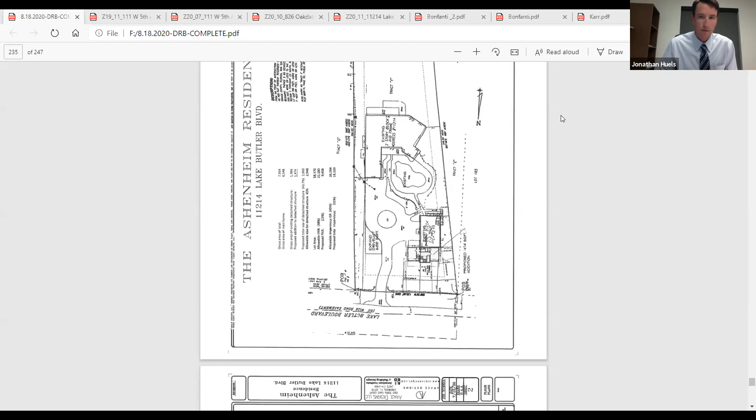Dr. Schur, if you have any additional comments—don't believe he does, he'll raise. Understood. Does anybody have any questions for Jonathan? Okay, alright.

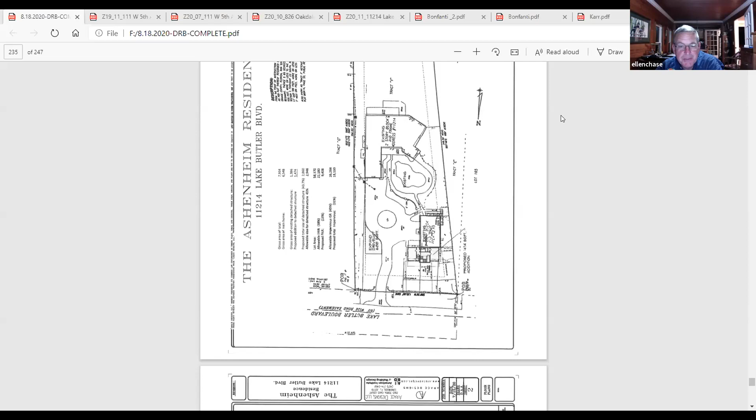Mrs. Ashman, we'll go ahead and let Dirk, or Mrs. Ashenheim, respond to the structure down by the lake that I saw the pictures of. And one at a time, please.

Yes, that was a small firehouse that a child built, but it has been sort of taken over by lizards, and it was something we were slating to remove. It was actually removed this morning, because it wasn't being used, and my grandson is much older now and thinks he's too old for that anyway. It was just a playhouse for a child—firehouse number 5 or something like that. That has been removed. There isn't actually any structure there now.

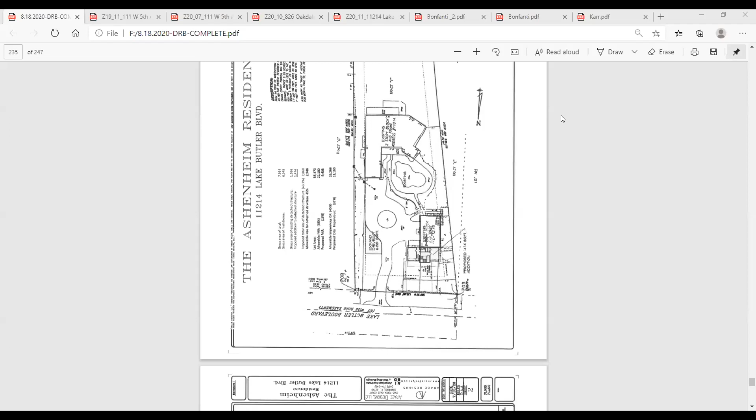I hope that helps. And it is—no, it's not 4 additional bedrooms, it's 4 bedrooms in the structure, because the bedroom that is in the current structure will not be a bedroom. Does that make sense? Because it's so small, it could only hold a double bed, and for a married couple, it won't even work for one couple. That was the reason why.

Okay, I'd also like—here's our girl. Sorry, I'll just address a couple of the points Jonathan made. Thank you for that information.

The actual setback for the new structure, if you look at the site plan, it's not 11 feet—it's going to be 16, and the other corner will be 19, and there's 20 to 30 foot tree buffering, so visually there's no impact.

And the other point you mentioned about the physical characteristics of the lot—there are no other real ample places to attach this. If we go in the back right, we could build 1,500, 2,000, even 3,000 square feet, but we don't want to do that, to avoid blocking sight lines and to keep the light and the nature of the lake intact. We don't want to build a 2-story box behind the house.

As well, if the pool was there, the house was there—if this house was moved over by 3 feet, it wouldn't be non-conforming in that respect. So we're just trying to get the best location for the structure.

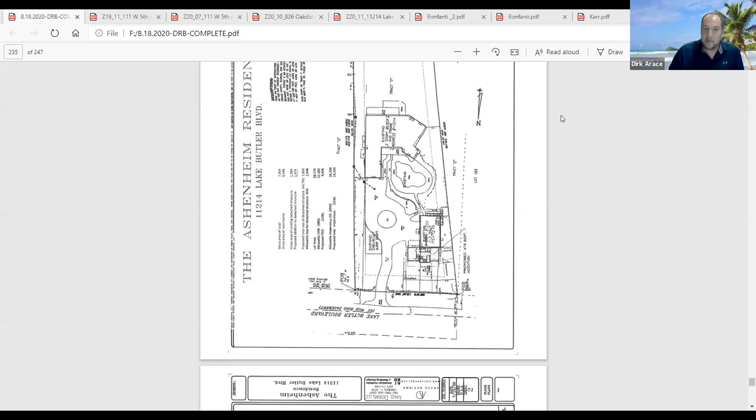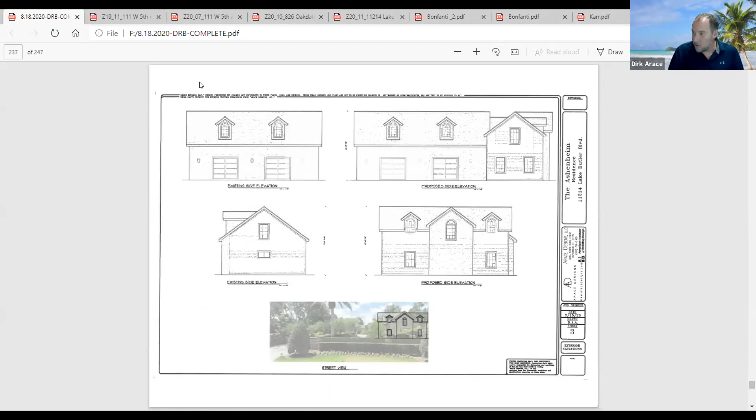We could, again, with the FAR of the main house, attach something of up to almost 3,000 square feet. We don't want to do that. The footprint is actually about 750 square feet, so it's not really 1,400 square feet—it's an 18-foot wide section. You can see the left-hand existing side and the right-hand proposed side. And also, if you look at the map, next door there's a front structure that's closer to the street than ours.

11206, I don't have the map in front of me, but if you go down the street toward the west, at 11332 there's a front structure. Also at 11340, there's a front structure.

There's 4 to 5 of these on this street. Yes, they are smaller, yes, they are simple garage structures, but whether it has 4 bedrooms or 1 room, or whether it was a garage, it would still have the same visual impact. There won't be any quality or sound issues because it's all going to be private behind the gates, so I hope that alleviates the neighbor. We're trying to do the best we can, and this seems to be the best location.

A couple questions for either Brad or Mr. Fleck. It's my understanding that short-term rentals aren't allowed in Orange County, so what is the concern? Short-term rentals are preempted by the state. Orange County did get approval a few months ago that reallows short-term rentals in Orange County, so short-term rentals are allowed in Orange County.

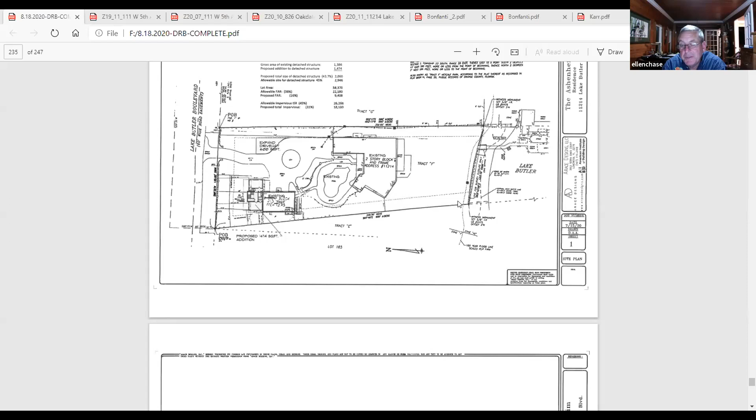Correct, Brad? Yes, you can do it that way, absolutely. Other than that, it's 2-2, and whether there's motions for a 2-2 to approve, then it'd be denied in that manner too. Right. So council will just see it as a 2-2 tie, which they can take it either way. Okay, does anybody want to discuss this any further, or should we just move on?